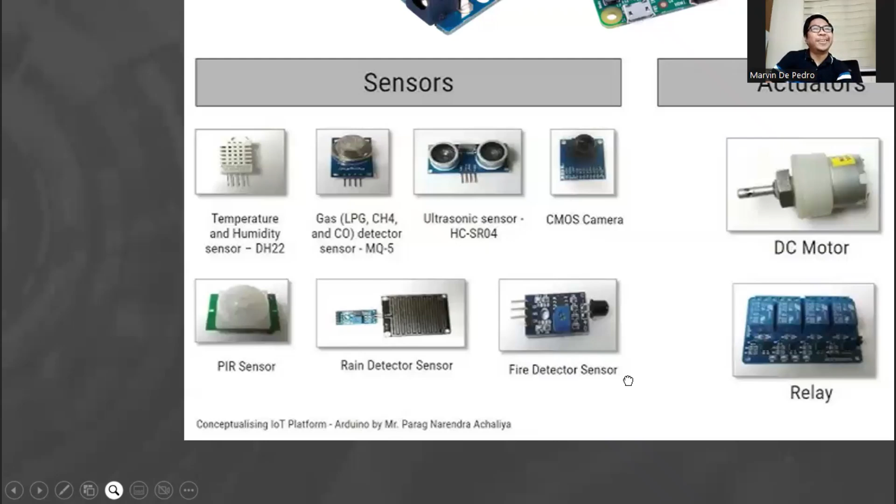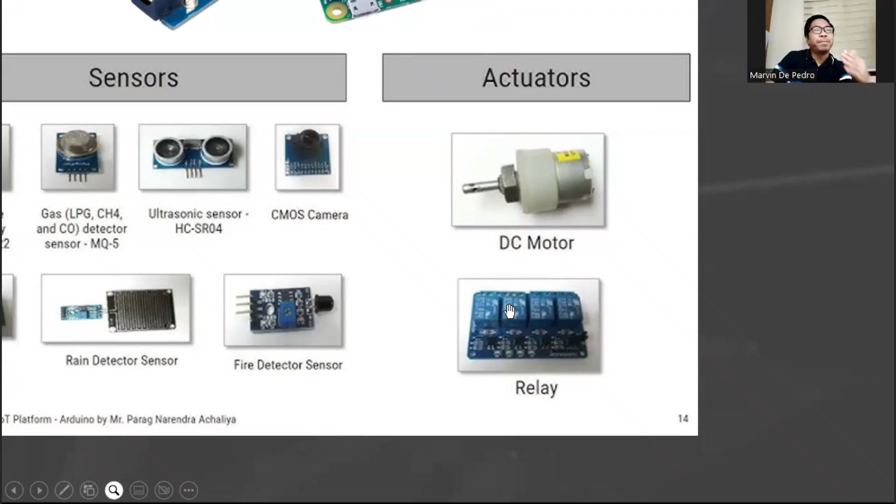There are also many kinds of actuators, but the most common, especially for beginners, are DC motors and relays. Motors, of course, for movements, relays for switching large machines on and off. Both small and large machines can go through a relay to be powered by our Arduino or Raspberry Pi.

So these are them - just pocket size boards, for those who don't know yet. Please search if you want to know more about this.

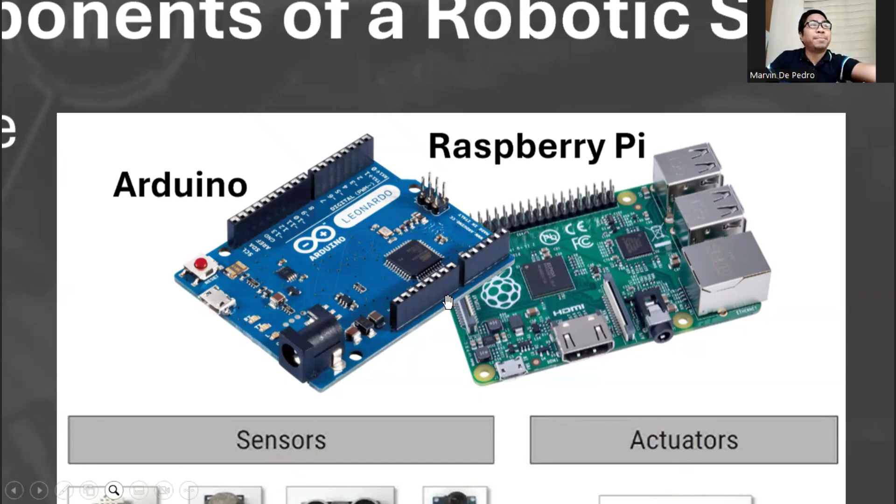Now, controlling these things depends on how we configure them - how the architecture of these components is set up. For example, if we want it fast, each time something is sensed it acts right away, or each time the robot acts we sense it again immediately, or we have some form of measurement or monitoring, then that's a reactive paradigm - act, sense, sense, act, back and forth. That's called the reactive paradigm of our control.

If you want to make a robot smarter, there should be planning ahead between sensing and acting. For example, the ultrasonic sensor senses that the robot is near an edge, so it will plan its steps, direction, velocity, and other parameters.

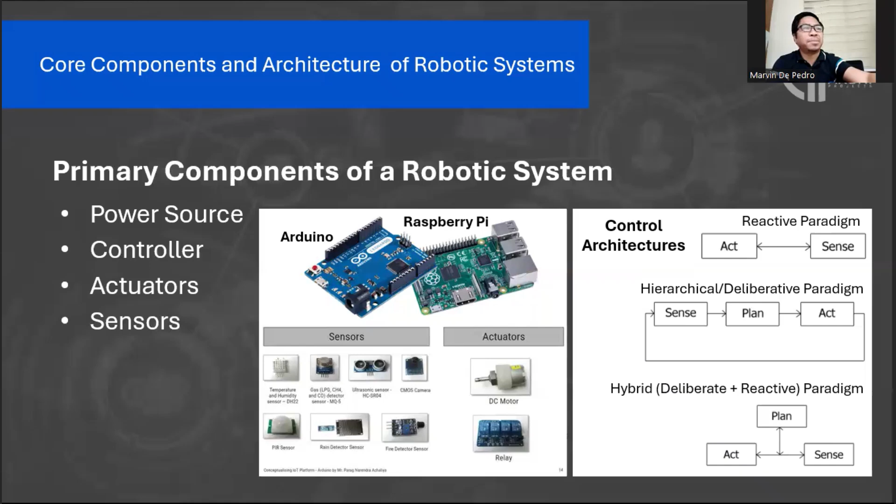There are other components of a robotic system, especially for manipulation robots—we have the manipulation components. Let's zoom in on that.

Manipulation robots most likely have what we call joints and links. Together with the base, the joints and links form the manipulator itself—like the arm in a human hand. And at the end of the arm, just as in human beings that's the hand, in robotic arms or manipulation robots these are called the end effectors.

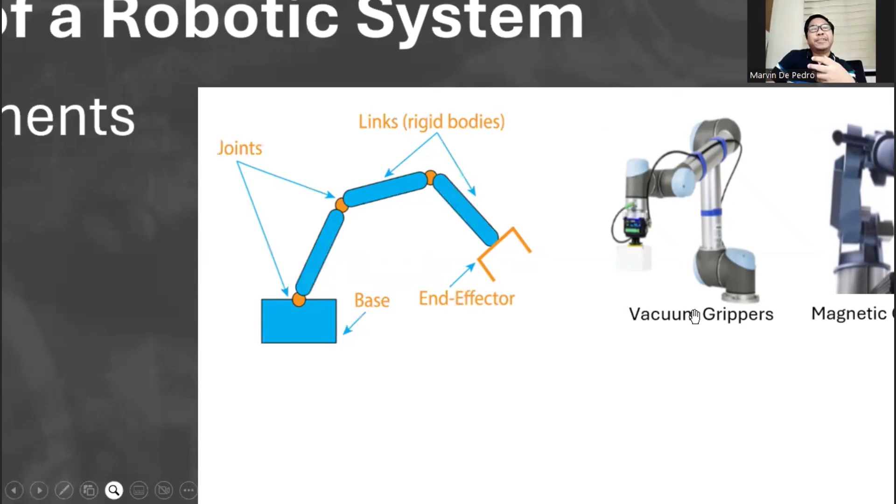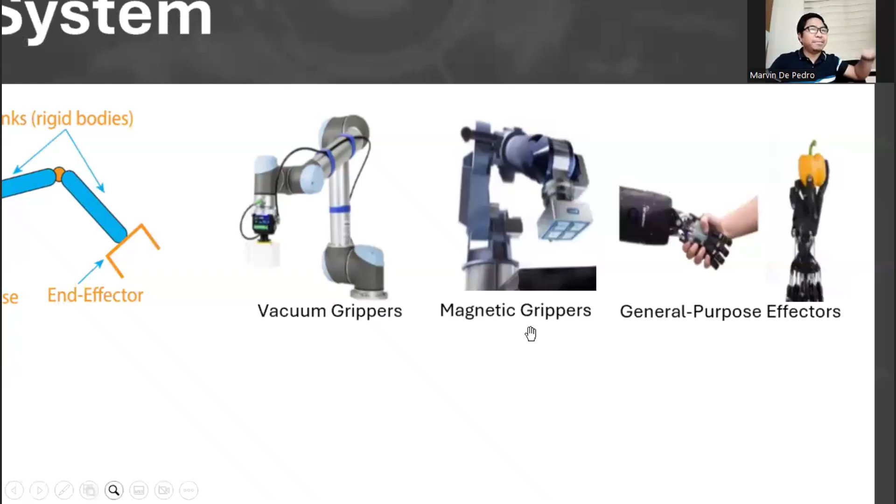Depending on our needs and usage, end effectors could be in the form of vacuum grippers—so its hand is a vacuum, or it grips, or it's magnetic, or it could be general purpose like human hands. So those are what we call manipulation components.

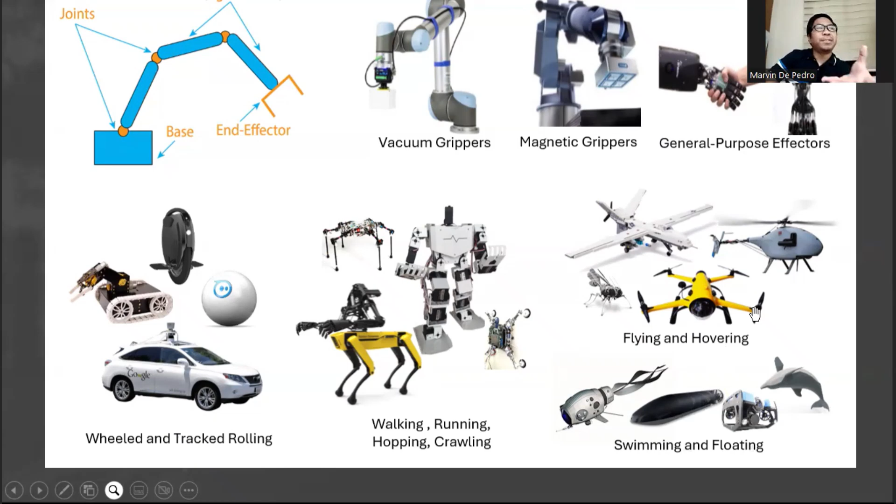While for flying and hovering aerial robots, and swimming and floating robots in water, I'm not sure, but more often than not DC motors are used there too. It's case-to-case basis. Whatever locomotion mechanism you design, we mostly mimic what's in our natural environment. So it's not an accident that some robots look like animals, because how the locomotion of those animals works is also used as the basis for the mechanism of the robots we design.

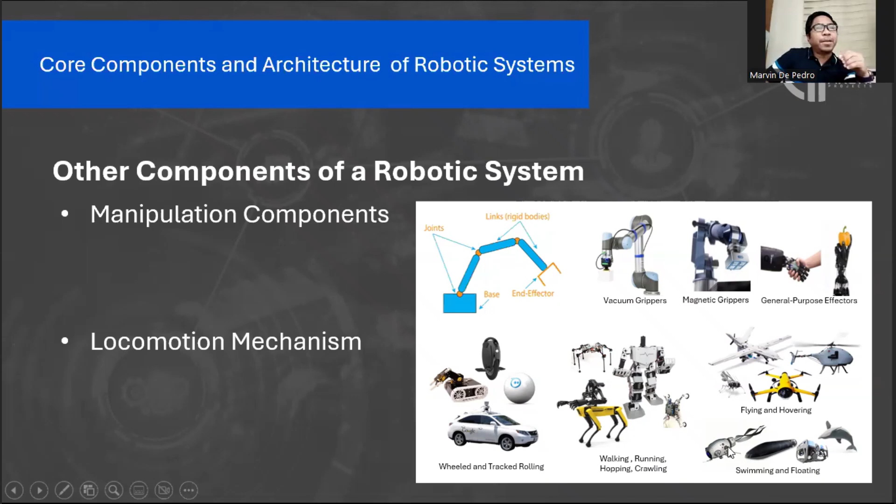Now if you want our robots to be more advanced and smarter, we might as well include these other components. If it's intended to move around a certain environment, it must be able to interact with its environment, not just navigation.

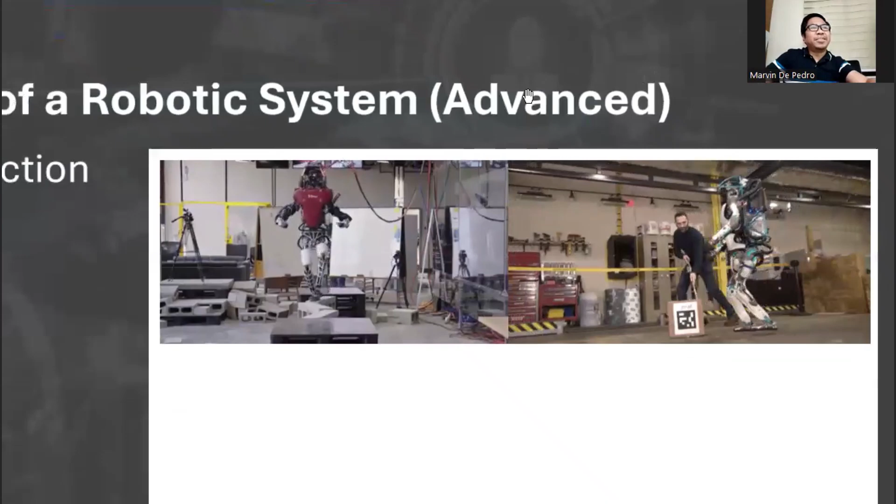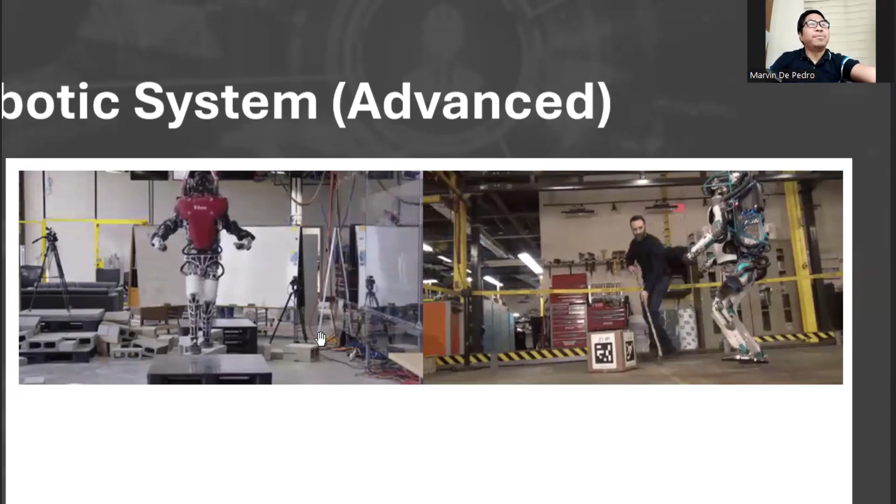Sa left picture natin, yung robot natin is trying to cross a narrow path, parang bridge. Kung hindi siya maingat, kung wala siyang planning na gagawin, malalaglag siya. Sa right side naman, naka-target lock yung robot sa isang box na may certain QR code. Kahit saan pumunta yung box na yan, doon din siya pupunta. Pag gumalaw yung kanyang target, gagalaw din siya at mag-a-adjust ng kanyang navigation, malalaman niya kung malapit na siya or malayo pa, kailangan pa niyang gumalaw or stop na.

So that's regarding the environment. Now, regarding human beings also, we have the component called human-machine interaction.

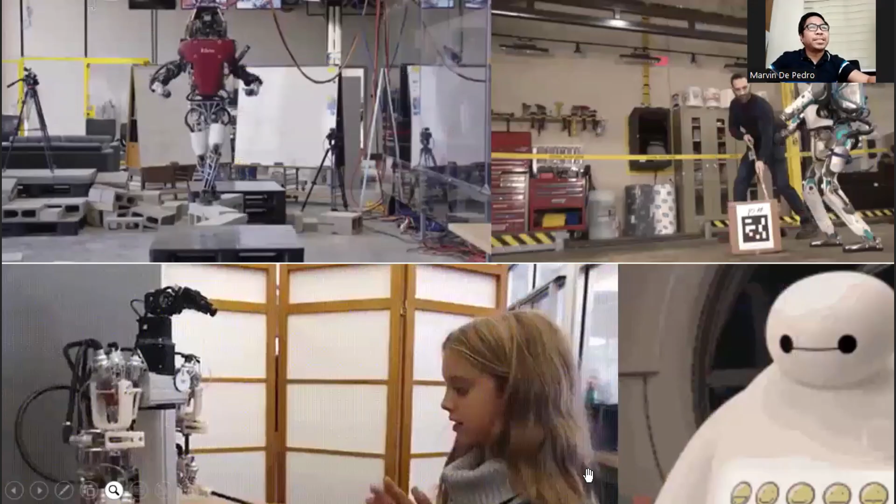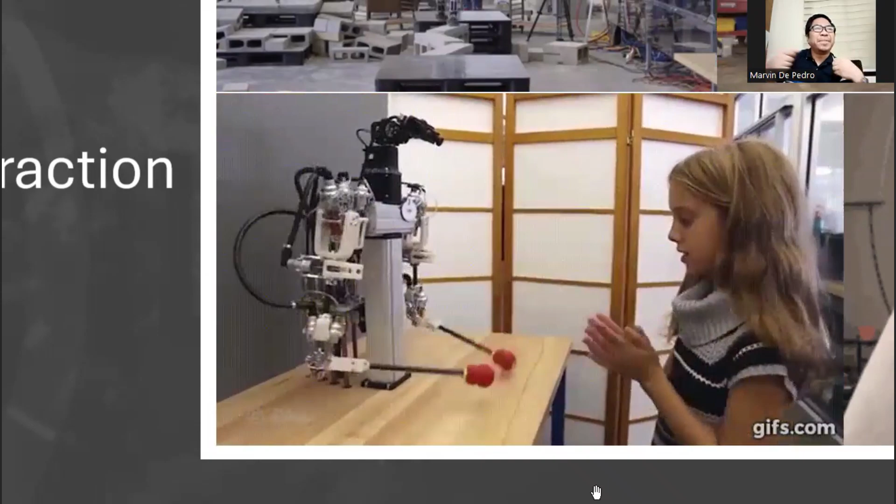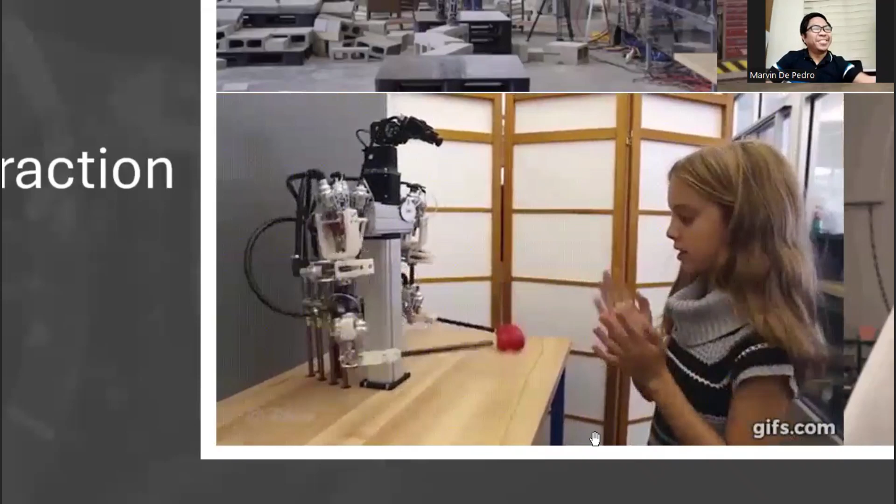As you can see sa picture natin, mamaya na si Baymax, yung babae, yung little girl, observe. Nagbe-base siya sa movement ng babae. At yung kita niyo sa balloon, binigyan siya ng balloon, sinalo niya din. Alam niya na yun yung expected na gawin niya, at expected siyang mag-clap or mag-play ng game na yan. Nakakatuwa.

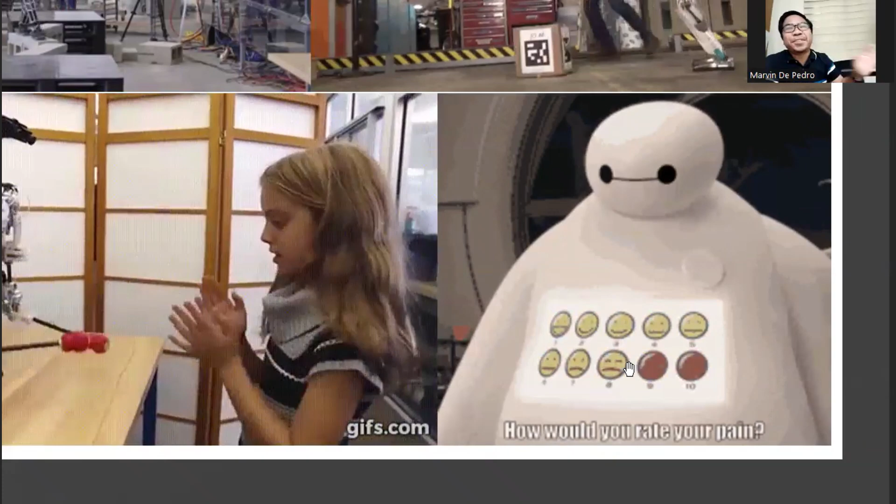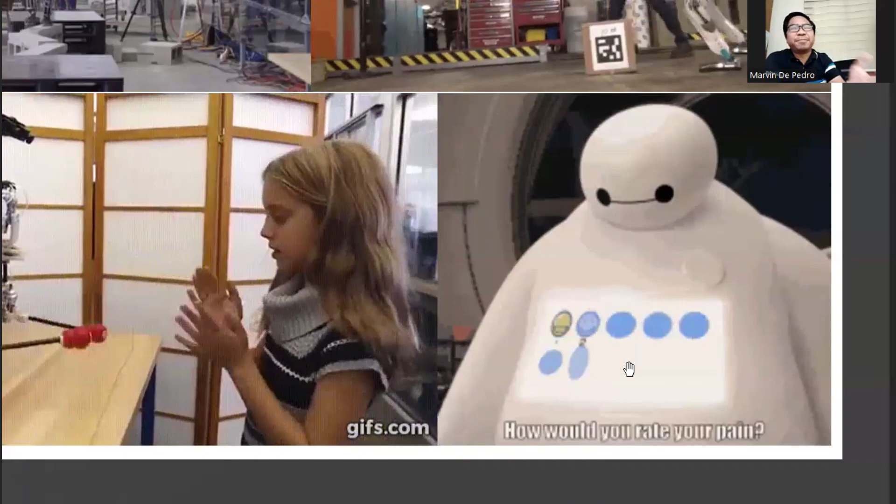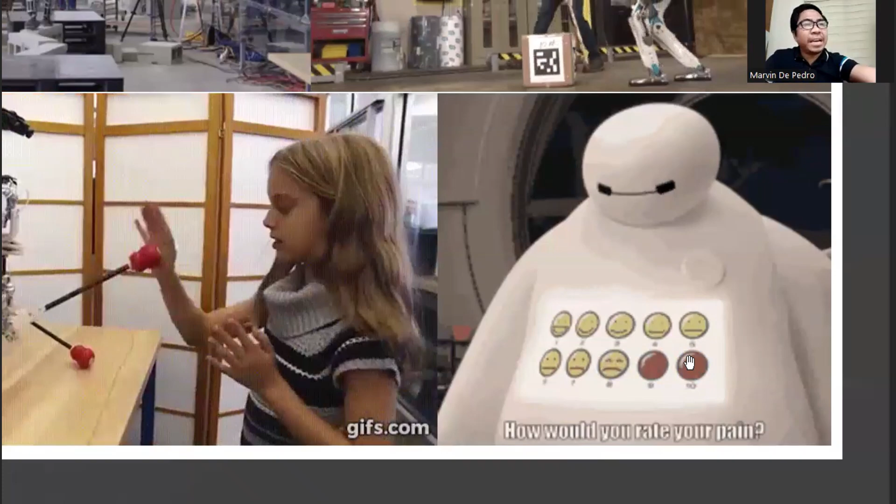Also, of course, si Baymax is a good example of human-machine interaction. Sa entire movie, kung alam niyo yung movie Big Hero 6, maraming examples ng human-machine interaction or human-robot interaction sa ibang textbooks. Halimbawa, si Baymax, may nasense siyang pain kay Hero, yung bata. Alam niyang may pain, pero hindi pa niya ma-comprehend kung how much yung pain, kaya tinatanong niya. May interaction yung human, si Hero, at sa kanya. Aside sa na-sense niya, may input din siyang kinuha, so that's another form of interaction. Nag-uusap sila at the same time, kaya niya ding mag-sense ng iba't ibang parameters.

Okay, so these are some advanced components of our robotic system, at doon na papasok sa AI. Itong dalawang components na ito involve AI na. Kung wala to, kung yung nauna lang, mas basic na robotics po yun.

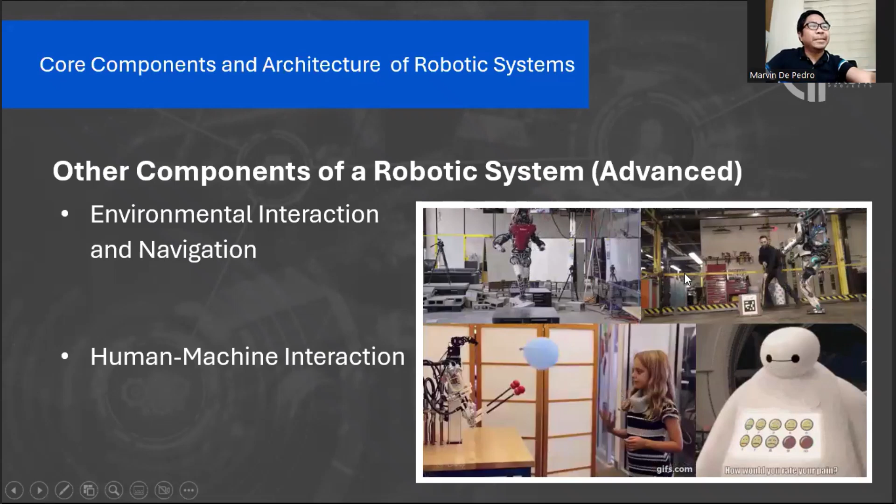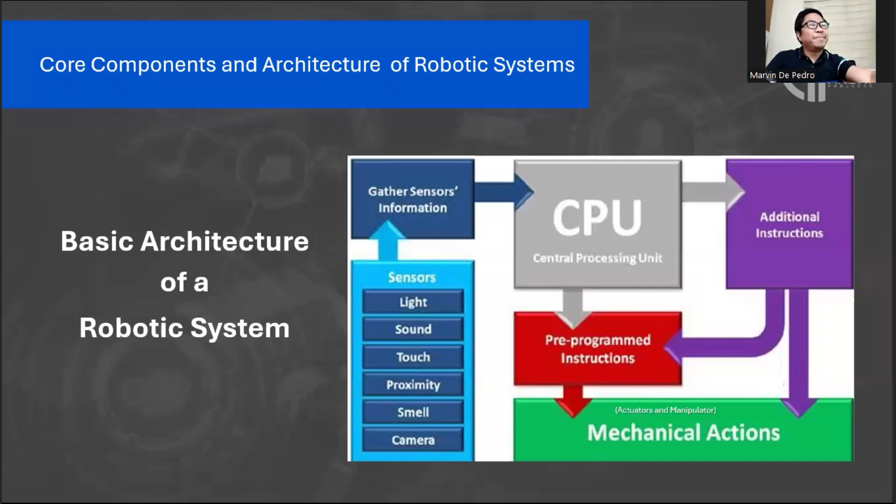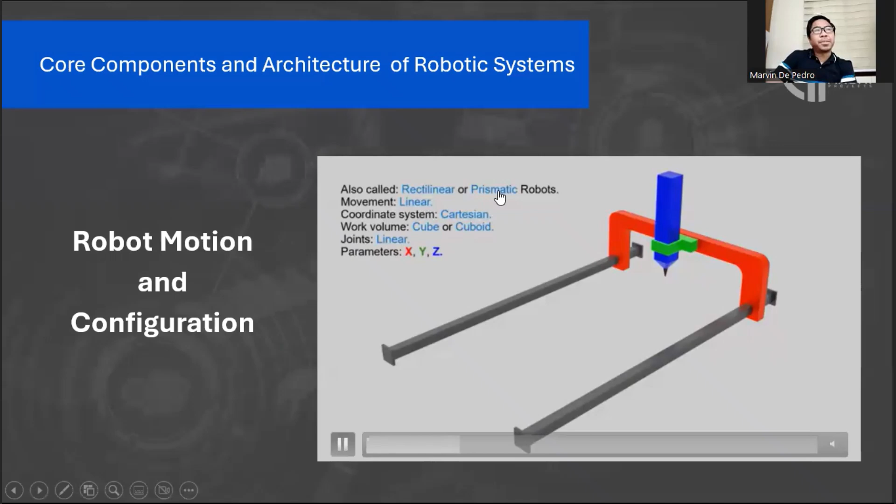Speaking of mechanical actions, konting introduction lang on the different types of robot motion and configuration, dahil ang robots ay also identified depende sa kanilang motion. Halimbawa, ang first common type of robot ay ang Cartesian. Ang movement niya is along X, Y and Z axis, either x-axis lang or y-axis or z-axis, linear lang along a straight line. Also known as rectilinear or prismatic robots, linear movement, pwede siyang cube or cuboid, and the joints are linear.

Another type is the cylindrical robot, parang cylinder, tang lata, so pwede siyang paikot. Pwede na siyang up and down and mag-move left or right, may movement siya pag ganito, and may movement siyang up and down.

Another type is the polar robot. May common na pole siya, also known as spherical robots, rotational ang kanyang movement. Similar to the polar robot, we have a more advanced one, SCARA, which stands for Selectively Compliant Arm for Robotic Assembly. Cylindrical po yung kanyang movement na may pagka-polar.

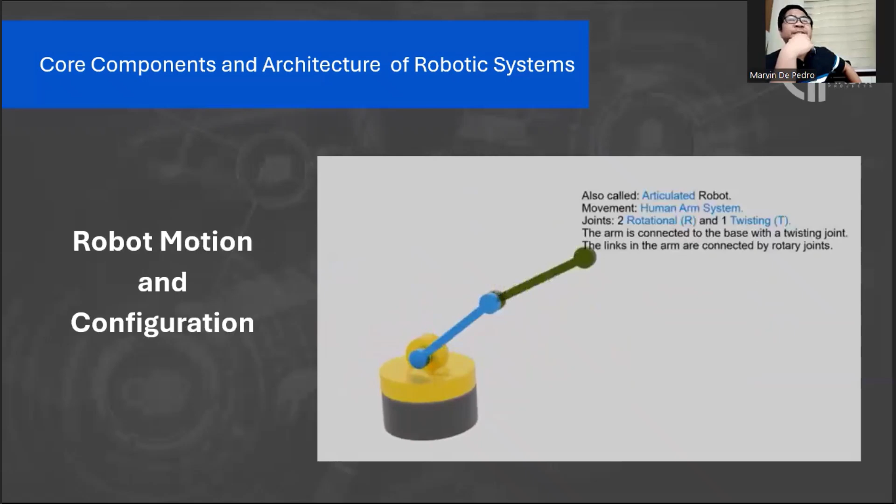The other one, last one I think, a more advanced version also of the polar robot or spherical robot, is the articulated robot. Polar siya na may extension, may another joint siya, another link, and so on.